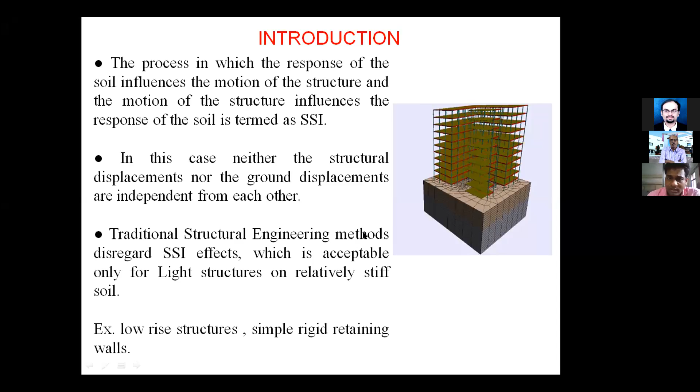Examples for traditional structures are low-rise structures and simple rigid retaining walls. The codal provisions for soil structure interaction are not included in IS code, but Eurocode 8 and JSCE 2005, that is Japan Society of Civil Engineers, have included specifications regarding this approach. P-delta effect is considered for the soil structure interaction. P-delta effect is the non-linear effect, also called the large deformation effect. So Eurocode and JSCE code both have special guidelines for soil structure interaction.

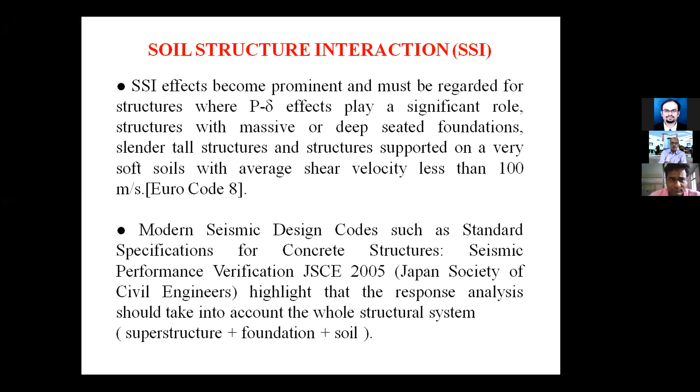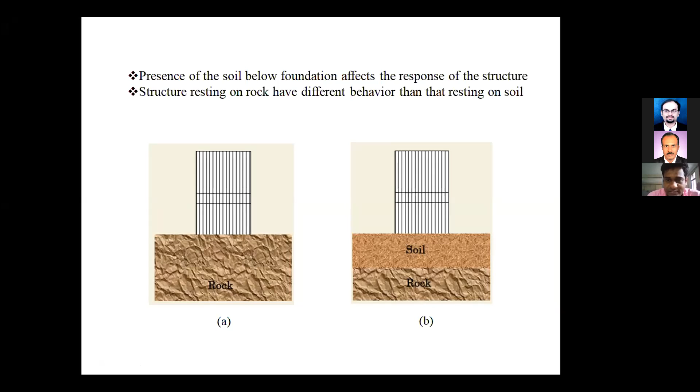Now how the shaking affects the structure is mentioned here. We are taking the second figure, figure B, from the previous slide. In this figure, there is a free field motion of the top layer of the ground, that is the soil strata. This free field motion is independent of the structure.

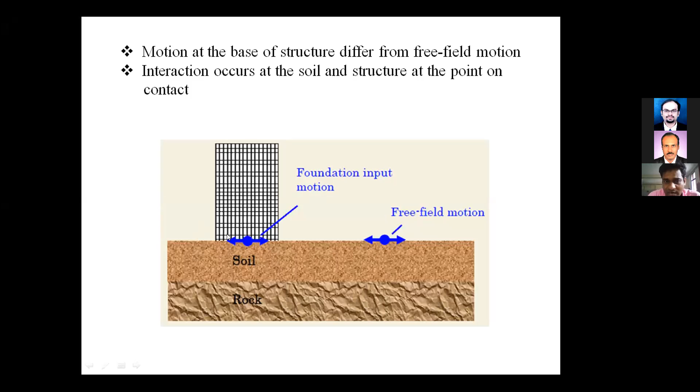Now if the structure is resting on the soil, the free field motion of the soil gets affected by the structural foundation. When there is motion, the foundation input motion and free field motion will counterbalance and affect each other, and hence motion of the structure at the base differs from the free field motion. The interaction occurs at the soil and structure at the point of contact, that is the base of the structure, the foundation.

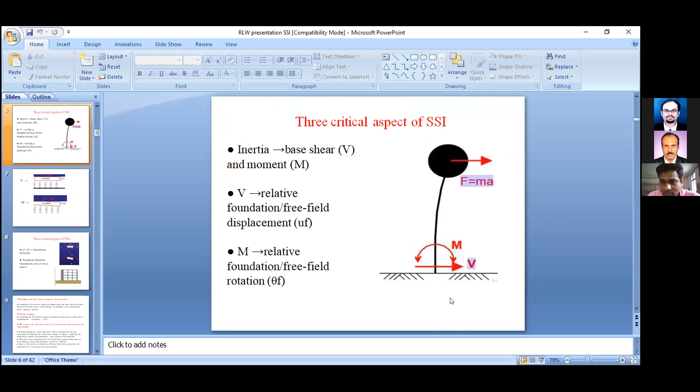Now the basic concept of the soil structure interaction, and the mathematical formulation for the soil structure interaction.

Considering a building having fixity at the base, and the mass, lump mass, at the top, like an inverted pendulum. The building frame has mass at each floor, it has stiffness, and it has damping at each floor. Now considering the simple building frame, F equals m into a, force equals mass into acceleration, and our equation of force is F equals K into delta, force equals stiffness into displacement.

Now, if we want to include mass and damping, our equation becomes mu double dot plus cu dot plus ku equals to f of t, where m is the mass, mu double dot is the acceleration, cu dot is the damping into velocity, ku is stiffness into displacement, equals to f of t, that is the force, and f of t will be represented by f of g, that is the force due to the ground motion.

Now here we have the force, and it should be balanced by the bottom force for equilibrium. As it is having displacement, the eccentricity will cause the moment, and hence we have the force moment.

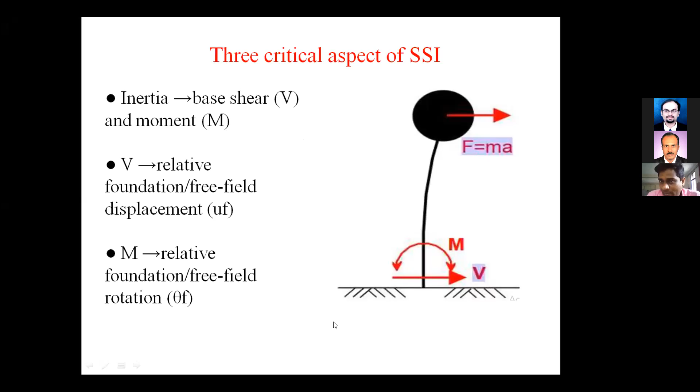Now consider this figure. The structure is resting on the foundation. We are taking the FBD at the foundation. The foundation is resting on the soil, and hence soil foundation interaction can be represented by the springs.

Here, these springs are not fixed, and hence rigid foundation fixity is avoided.

Now, in this case, if there is a displacement, it will cause the shear. In the vertical direction, springs are provided to cause translation in the vertical direction. In the horizontal direction, a spring is provided to cause translation in the horizontal direction, that will be the U, and hence it is the interaction for shear.

Now, if we consider the moment, moment is resembled by the rotation, and here the foundation is rotated by some theta amount, causing the moment. The spring will have some delta at this point, another delta at another point, and theta. Hence the shear and moments are to be considered at the soil structure interaction, and the corresponding equation has to be formed.

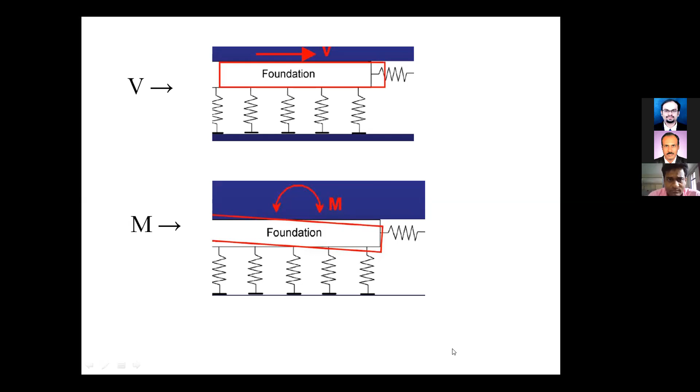Another figure shows the same effect for UF and theta, that is UF meaning displacement at the foundation, and theta meaning rotation at the foundation. Displacement causes the shear, theta causes the moment.

Now damping is also there, and damping is caused by the damping factors which are governed by the foundation which acts at the wave source.

The figure represents the FBD at the base due to the displacement causing the shear. The second figure is for the rotation causing the moment, and this figure is shown for the damping, and damping is for the waves at the wave source at the foundation, because there will be a dampness, and damping means opposition to the motion, caused by this foundation.

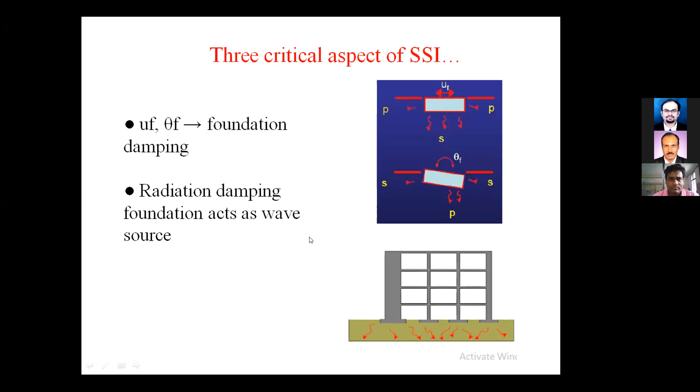Now we have seen the basic concept of the soil interaction, but yet we have not seen how this soil interaction is modeled. We have only seen that the soil interaction is caused due to the interaction between the soil which is present below the foundation.

Now there are some effects of the soil structure interaction on the structural response, and we can say that soil structure interaction effects alter the natural frequency of the structure. If we consider a structure resting on firm ground, the natural frequency of the structure resting on firm ground is different than the natural frequency of the structure resting on soil.

For example, soil structure interaction makes a structure more flexible than rigid, and thus it increases the natural period of the structure as compared to the corresponding rigidly supported structure. So soil structure interaction increases the natural period of the structure. This is the first effect of the soil structure interaction.

Now second, soil structure interaction adds damping to the structure, by means of the foundation present above it. Considering the soil structure interaction, it affects or increases the damping ratio of the structural system.

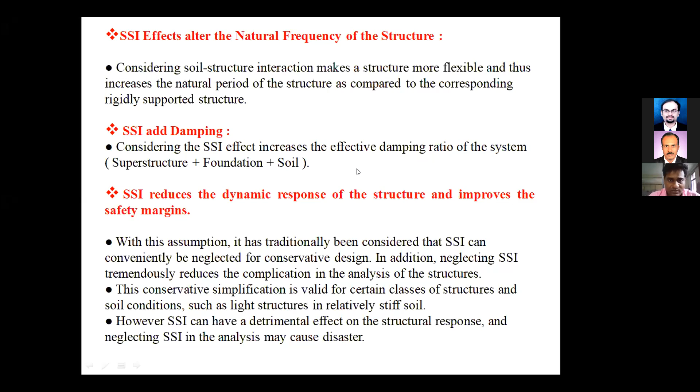Now we have the detrimental effect of the SSI, that is the soil structure interaction. An increase in the natural period of the structure due to SSI is not always beneficial as suggested by the simplified design spectrum, but we need to go for the simplified approach using the soil structure interaction, where we can check whether the natural...

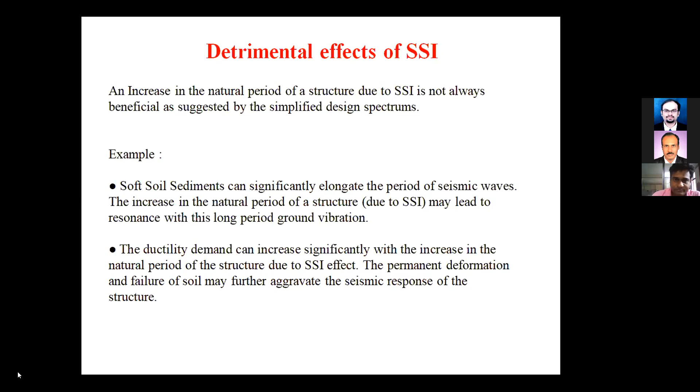Now soil structure interaction is classified into types: the first is the inertial soil structure interaction, second is the kinematic interaction, and third is the foundation deformation.

Inertial force equals mass into acceleration, and inertia should be considered, that is one type of interaction.

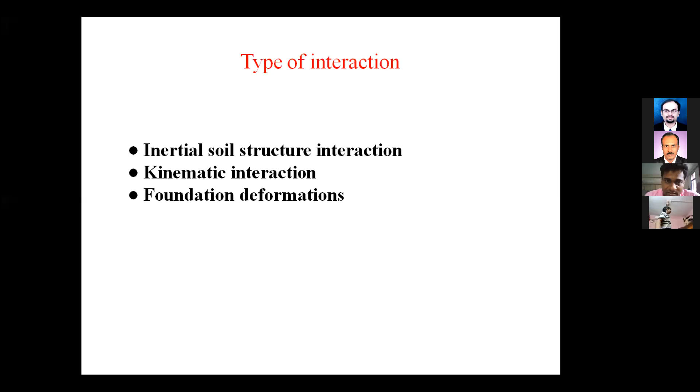Third is foundation deformation. Foundation means it has sufficient area resting, or sufficient mass over a sufficient area, resting on the ground at some specific area, that is the foundation. This interaction is called the foundation deformation interaction, as the SSI, soil structure interaction.

Now we will see all these three types of interaction.

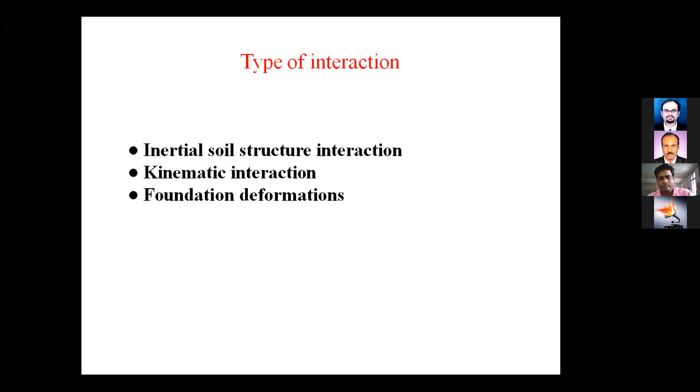Inertial soil structure interaction: the mass is resting, and mass causes inertia forces due to shaking. F equals m into a, mass into acceleration, and F is called the force, which is the inertial force. So there is inertial interaction and inertial forces in the structure, which are transferred into flexible soil by the foundation.

Inertia from vibration of the structure and foundation causes foundation translation and rotation, that is the displacement term as UF and rotation term as theta F. It directly affects the system flexibility and mode shape.

Mode shape depends on the fixity and the displacement, and hence both are dependent on each other. If there is inertial interaction between the soil and structure, the flexibility and mode shape will be different than that of a normal structure. The inertial soil structure interaction introduces foundation damping.

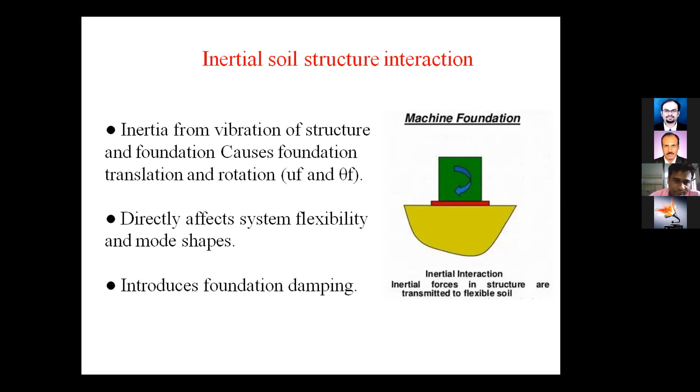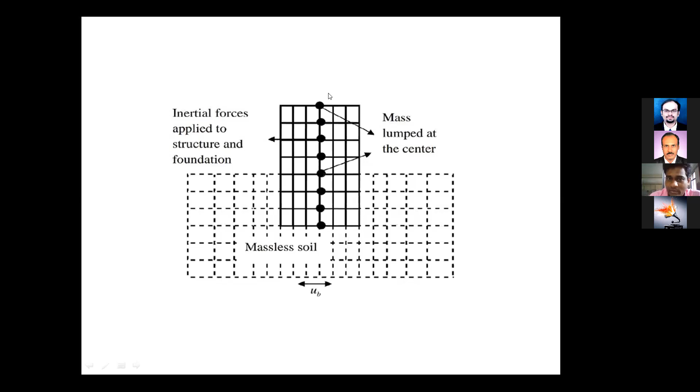The kinematic interaction is caused due to the ground motion. Kinematic means there can be a velocity with respect to time. We have the equations for u, v, and acceleration. For general fixity, we consider only force into delta, or k into delta equals F. But if we consider the kinematic interaction, we will have to consider the equation of motion, that is mu double dot plus cu dot plus ku equals F of t plus or minus F of g.

U1, that is the velocity of the above structure, with respect to U2, both depend on the ground motion reduction with depth, and hence it is called kinematic.

The kinematic interaction takes place due to two different velocities, because the velocity of the induced ground motion will be different, and may be larger than the velocity induced at the structural interface. So both are different, and the difference can be taken for the modeling.

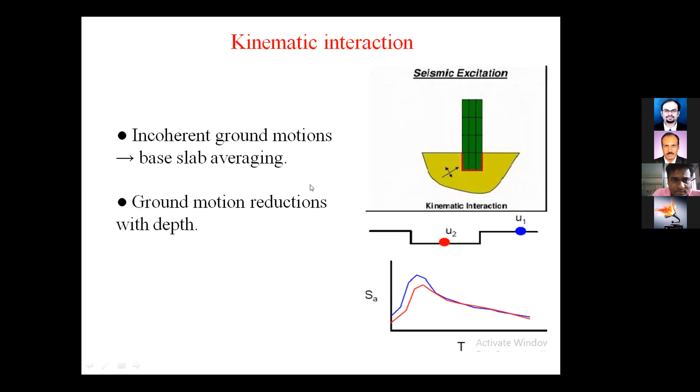Kinematic soil structure interaction has three primary causes: base slab averaging, embedment, and wave scattering. Base slab averaging results from the stiffness of the foundation at the base. Embedment means variation of the ground motion with depth, and wave scattering means scattering at corners and edges due to the induced vibration.

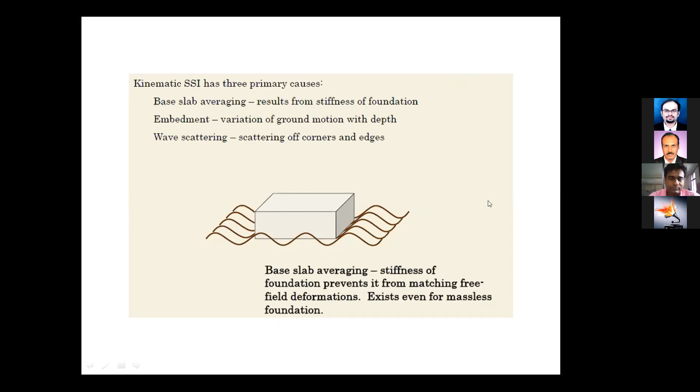Now, foundation can be a shallow foundation or a deep foundation. If we have a pile foundation, the pile can be rigid or the pile can be flexible.

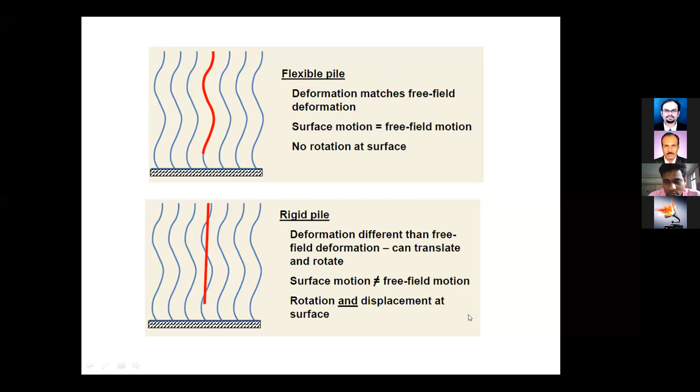Now for ground motion, we have the velocities: S waves, P waves, and L waves. The ground motion amplitude decreases with depth. If there's vertical propagation of waves, those are called shear waves, and hence vertically propagating shear waves can cause rocking as well as translation.

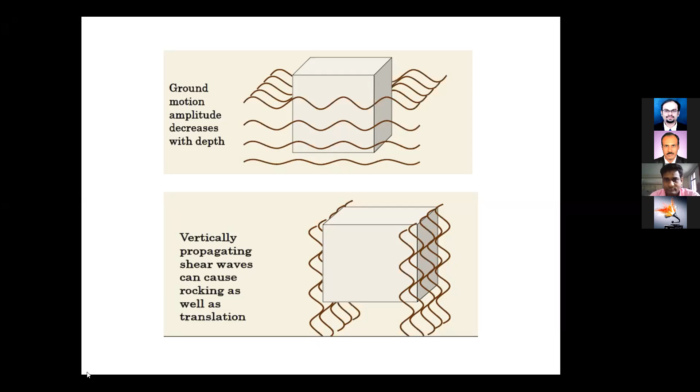General figure: when the load of the superstructure comes on the ground, and due to inertia, foundation deformation causes excess settlement, resulting in differential reaction at both corners of the foundation. That is the case when there is a foundation having sufficient depth.

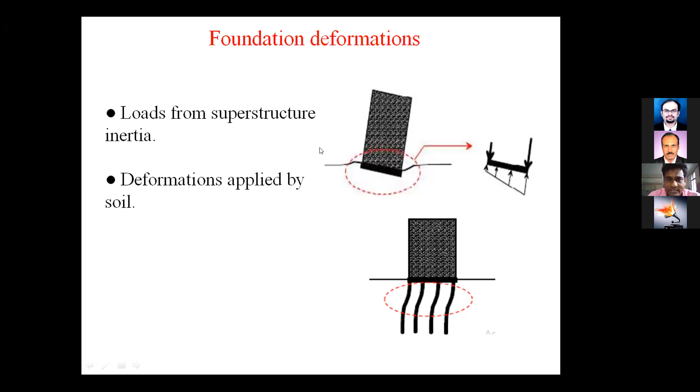Now, if the soil is deformed by some amount, the deep foundation in terms of the pile has translation and rotation. The first figure is shown for the foundation having sufficient uniform depth, but due to settlement it causes differential soil pressure. In the below figure, the pile is deformed and has some rotation as compared to the top surface, and hence it is the differential deformation applied by the soil. So this is the effect of the soil structure interaction.

Now, we generally go for piling. We provide the depth of the pile up to the point where the hard strata is available. Consider that soft, weak, compressible soil is available in different layers. In this case, for poor soil, we provide a platform, and that platform as a foundation is raised on the pile.

Now, this is the pile group having pile caps at this end, and these piles are resting on the hard strata. Though there is hard strata resting, and this pile is resting on the hard strata, the soil is still there, and skin friction is there.

Then the motion, the waves of the soil affect this deep foundation, that is the piles, and it causes translation and rotation of this pile because the piles have sufficient depth. Due to this, the load acting beneath causes horizontal translation, and the reaction at the bottom can be counterbalanced by the force and moment with corresponding rotation that will be available.

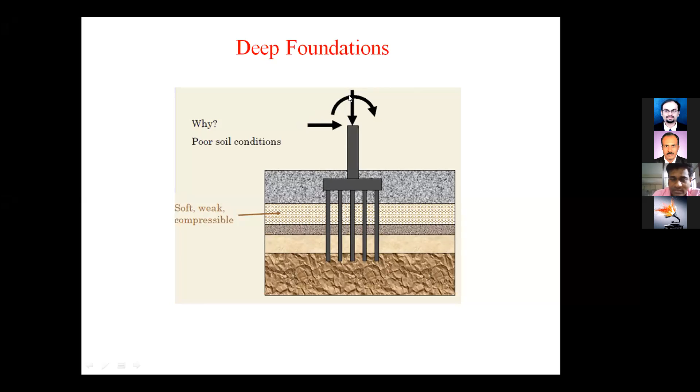Now, if we have the deep foundation, how is the deep foundation to be modeled using soil structure interaction? For modeling the soil structure interaction, we cannot have fixity at the base because it is not fixed, and hence we will have to provide allowable translation and allowable rotation at different interfaces, and those allowable translation and rotation can be modeled by equivalent springs.

So here the equivalent springs are provided at different levels. This figure shows the spring for downward translation, another spring in the horizontal direction for horizontal translation, and this represents the damping - this green rectangular shape plus vertical line is for the damping, because it also has damping. So all this can be modeled by the equation of motion.

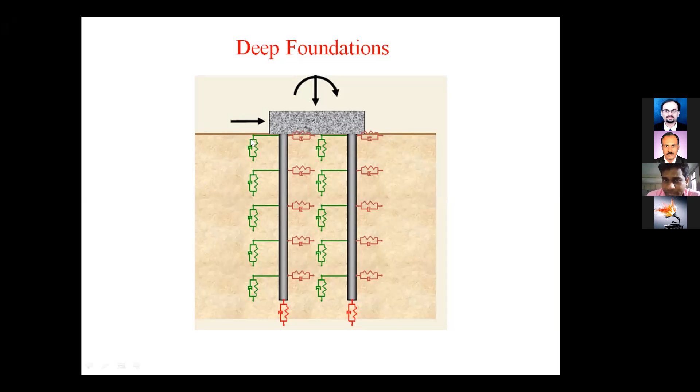When there's a pile group, uneven settlement decreases the axial load for potential pull out, or it can increase the axial load causing potential bearing failure at the base of the structure. Hence for this modeling we have the TZ, QZ springs and PY springs. TZ, QZ means it is in the Z direction, and PY means it is in the horizontal direction.

So we will see how to model the soil structure interaction through a suitable example. I have included one example in which we can model the soil structure interaction by providing springs and giving the specified value of translation and rotation to the spring by virtue of the soil properties.

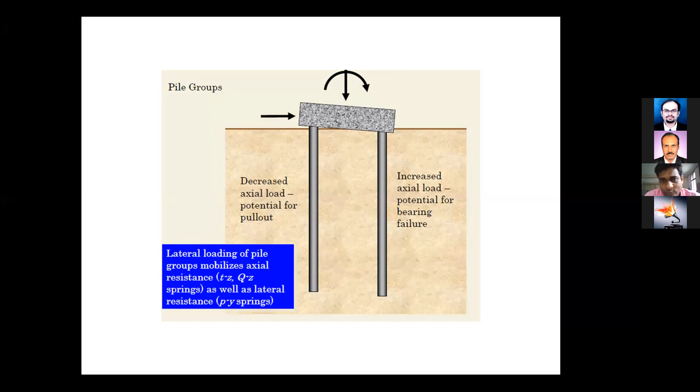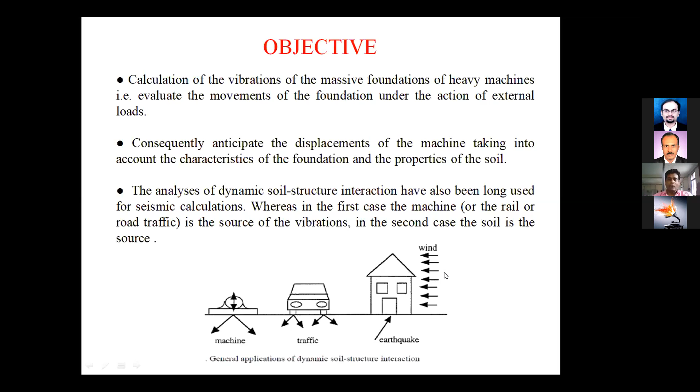Now, degree of influence of the SSI, that is the soil structure interaction, and influence of degrees of freedom. The response of the structure depends on factors such as the stiffness of the soil properties, then the dynamic characteristics of the structure resting on the soil, that is the natural period and damping factor of the structure, and the stiffness and mass of the structure. These are the influencing factors for soil structure interaction.

So while modeling soil structure interaction, we will have to consider the stiffness of the soil. From the stiffness of the soil, we will have to model the base, that is, we can call it the boundary condition at the base, by virtue of the stiffness of the soil.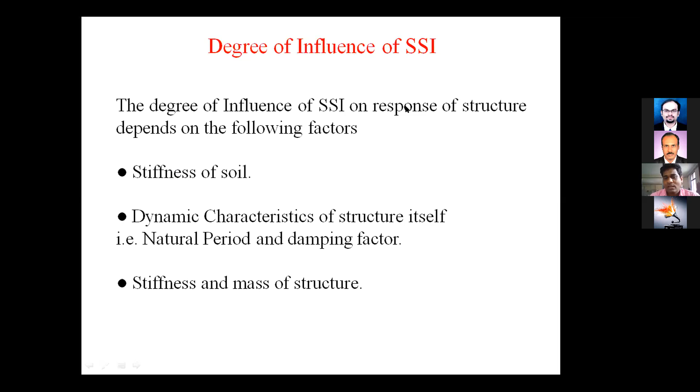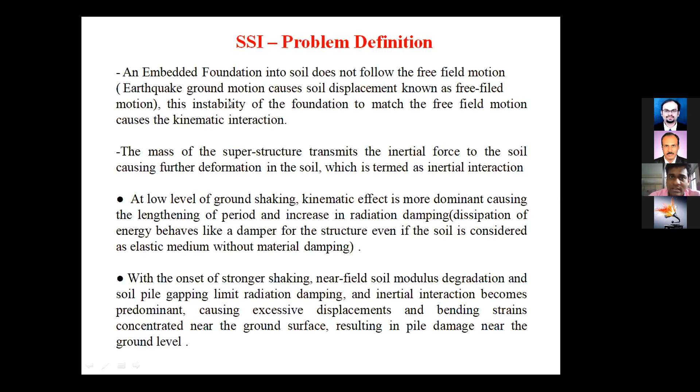SSI problem definition: we can say that earthquake ground motion causes soil displacement, and this is called the free field motion as we have seen earlier. This instability of the foundation to match the free field motion causes the kinematic interaction, because the mass of the superstructure transmits the inertial force to the soil, causing further deformation in the soil, which is termed the inertial interaction. Then there can be damping of the elastic medium. These problems can be termed soil-structure interaction, and hence it defines a specific problem of soil-structure interaction.

There are some methods which can be used for the analysis of the structure by using soil-structure interaction.

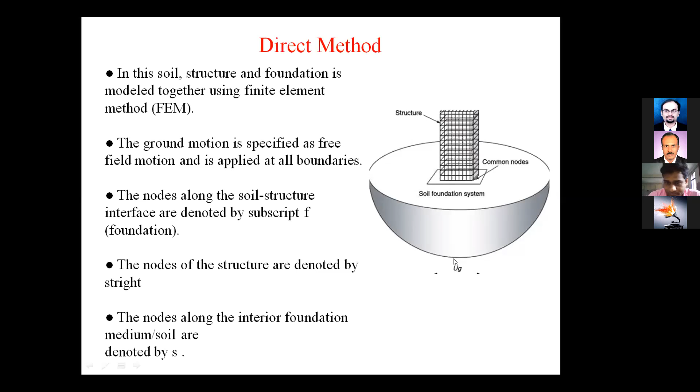The elastic half space model is used as the direct approach for modeling soil-structure interaction. For a general approach, we only use the building frame and fix the base by providing ux, uy, uz equal to 0, and theta x, theta y, theta z equal to 0 — the specified boundary condition of fixity. That is the simplified boundary condition. But in the direct approach of SSI, we must consider the elastic half space model, which is the model for the soil beneath the foundation.

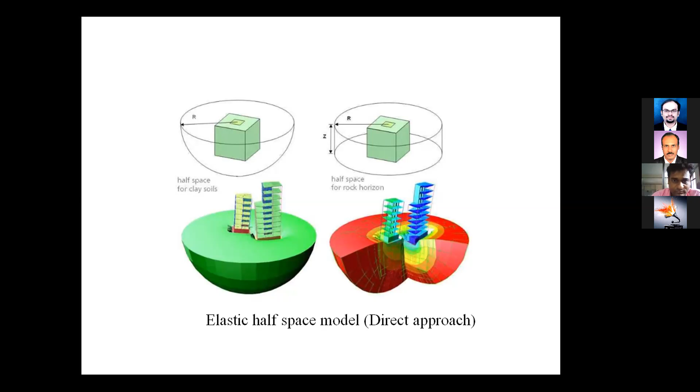Using the same figure, we have the equation MA + CV + KX = MG. What is MA? Mass into acceleration, A can be termed in terms of X. Now, when we do not use the dynamic equation, we use only Kx = Mg, meaning Kx = F. Mg is force, mass into acceleration due to gravity, so to speak. Kx = F, that is the static case.

Now for dynamic analysis, we consider CV plus MA. CV means C times X dot, and MA means M times X double dot. So KX plus CV, meaning C dx/dt, plus MA meaning M d2x/dt square — that is the equation.

Now Mg can be termed as F plus Fg. That is the force on the structure in the horizontal direction, plus Fg, the force at the ground due to ground motion.

The foundation media is considered here below the foundation. The interaction or interface is considered over this area. This structure is modeled, and it can be represented as an inverted pendulum having different degrees of freedom at different levels.

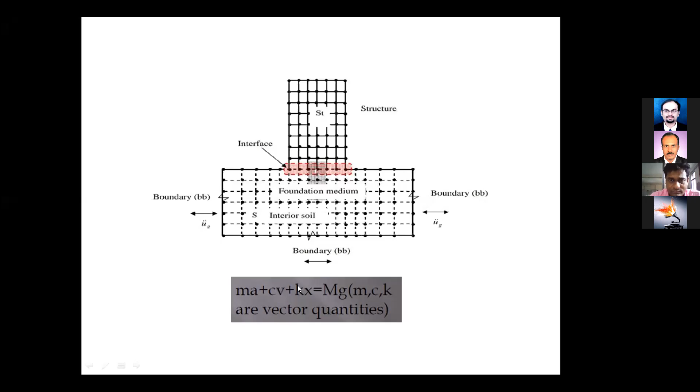There are some disadvantages of direct methods. The good representation of the damping matrix is difficult using the direct method. If the superstructure is modeled by a 3D system, the problem size becomes very large, and the modeling of the soil foundation structure interface becomes complex. That is the disadvantage of the direct method.

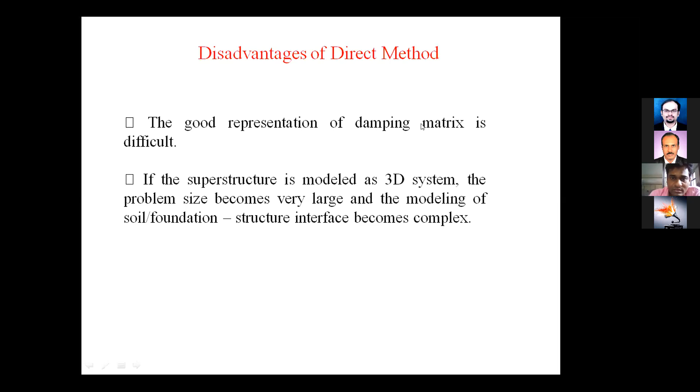Hence, to overcome the direct method, there is another method, the substructure method. In this method, one structure is resting on another, and both structures are modeled separately by providing the interaction. It is computationally more efficient than direct analysis, as most of the disadvantages of the direct method are overcome by the substructure method.

In this substructure method, the effective input motion is expressed in terms of the free field motion of the soil layer, and it is initially considered while modeling. In continuation, the soil foundation medium and the structure are represented as two independent mathematical models, as shown in the figure.

So there will be two forces: one is the reaction from this, so it will be oppositely modeled here. That force will be provided here, and relative displacement and rotation can be provided here. By providing this, the structure can be modeled and analyzed, causing the effect of this substructure on the existing structure, and that will be the actual model of soil structure interaction.

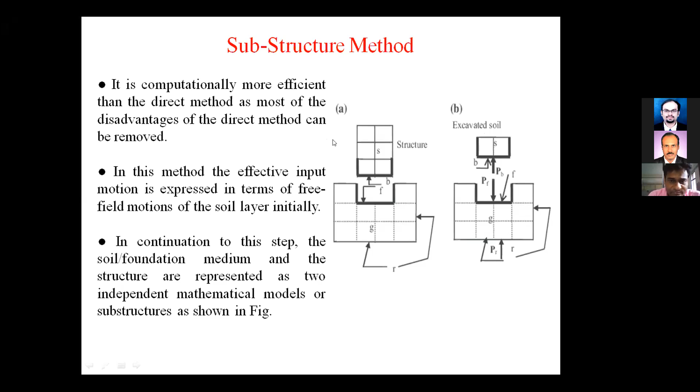Now the damping caused by this is provided here. Translation and rotation caused here will be provided and applied in the opposite direction to this portion of the structure. So that is substructure 1, which we want to analyze and design, and substructure 2 is for the soil interaction. By modeling this part with spring and damping at this junction, we model the structure for soil structure interaction.

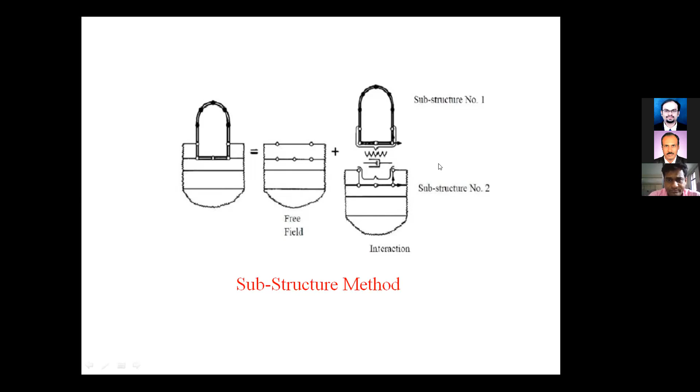Now, comparison between direct analysis and indirect substructure analysis. Suppose this I-type structure is resting on the foundation media, with the foundation and piling. Now for direct analysis of the method, as we have seen...

we provide translation and rotation in terms of springs and stiffnesses at different levels. The piling has some 10 to 15 meter depth, divided into 3 to 4 parts, and at each level we provide translation, rotation, and damping in the TZ direction, QZ, and PY direction also. This means it is three-dimensional in effect, and this induces vibration, with translation and rotation to be modeled for the soil structure interaction.

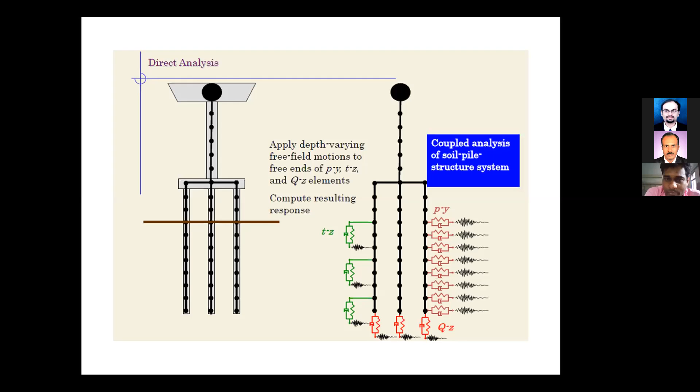Now, if we consider substructure modeling, instead of considering the entire area of the piling or foundation, we convert this into equivalent spring stiffnesses. These equivalent spring stiffnesses will be provided at the bottom of the foundation, at the support, by providing delta x, delta y, delta z, then theta x, theta y, theta z, in terms of this rotational spring and translational spring with damping.

So this is the actual modeling of this substructure. There are different approaches for this modeling. One approach says to cut the piles at the mudline and replace with spring dashpots—that is the equivalent stiffness spring model. Another applies kinematic pile motion at the mudline to determine horizontal, vertical, and rotational springs—that is the spring modeling—and computes the resulting responses. That is the SSI modeling using the substructure method.

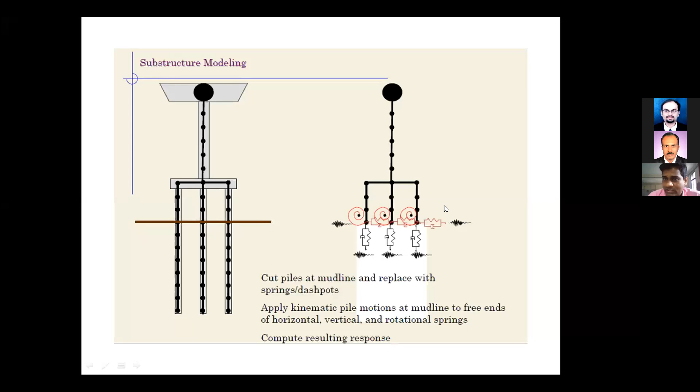Denoting the modeling using the spring, we have a building structure resting on the ground. The effective area of the soil is considered here, and we want to model the soil structure interaction for this frame. As usual, we will convert this into equivalent masses with inertia, first level, second level, third, fourth level, up to the bottom.

Bottom will also have to be modeled for vertical rotation, translation, damping, and horizontal translation and damping. This part shows horizontal translation and damping both available. Here, rotational spring with KR, a translation spring is also there, and CR is the damping. Moment mass M0 and inertia I are modeled. So at this point, it is modeled for the soil structure interaction, and the upper portion is modeled the same.

We go for the general modeling. This is the equivalent modeling in terms of rotational spring, translation spring and damping at the bottom. So this part one and this second part together consist of the soil structure interaction in terms of the modeling. If we don't have soil structure interaction, simply keep this as a fixed end.

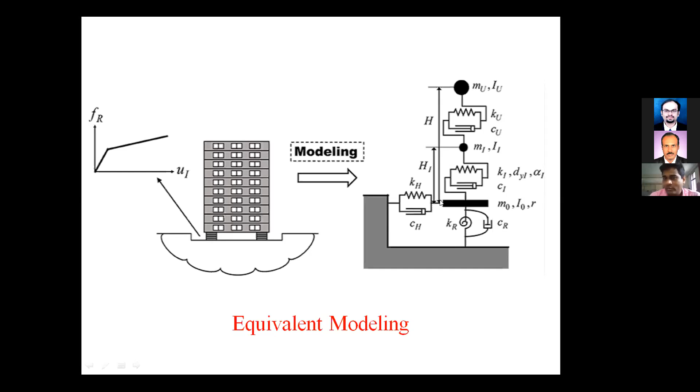For this modeling, we have different methods. One method for the analysis of the structure using SSI is the Winkler approach. Second is the PY method, that is the P delta method. Elastic continuum approach for the soil beneath, and finite element method.

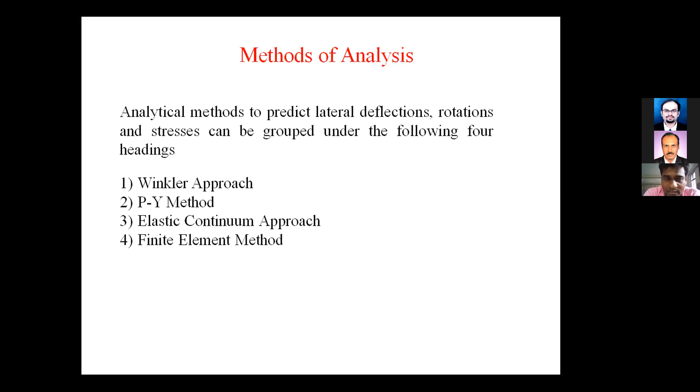Finite element method using generalized software is the easiest way because both can be modeled by providing the meshing. We only have to consider the area of soil with respect to some depth. That is the FEM modeling. Elastic continuum approach is continuous media, and it will have to be modeled. PY involves large deformation. And in the Winkler approach, we will see how it is used for the modeling of building frames.

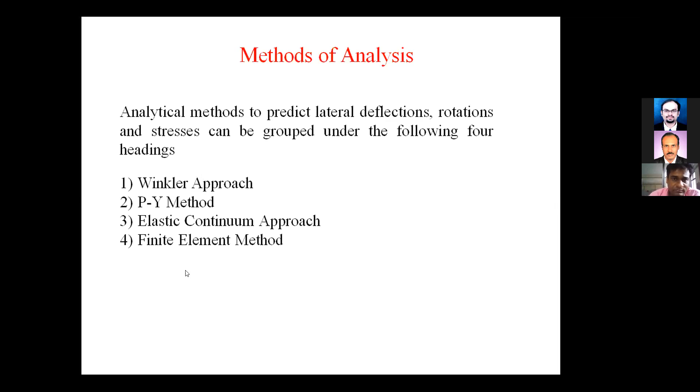Now, in the previous figure, we have seen this. Suppose this junction is the base. If we have a fixed base, we will provide only fixity here. No need to provide this rotational spring and translational springs.

What is the meaning of rotational springs? It is for theta x, theta y, theta z, and this is for ux, that is ux corresponding to kx, and fx will be kx into ux. Here we have this direction, that is x direction, we have y direction, and we have z direction. So you can term this x, y, and z as per your notations. In this equivalent spring model, we have kx, ky, kz, that is the stiffnesses of the equivalent soil spring.

So this spring is called a soil spring. Why soil spring? Because there is soil beneath the foundation, and above this there is structure, and at the base of the foundation we are providing the spring, and that spring resembles the soil, hence it is called the soil spring. Soil spring acts as the soil media, or soil spring plays the role of soil, and hence for playing the role of soil, this soil spring should have the properties of the soil.

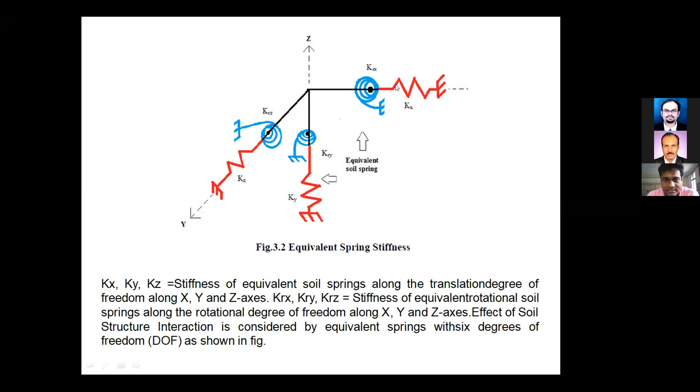So we have to go over the boundary conditions. If we have a fixed beam, what are the boundary conditions for a fixed beam? For fixity, we have boundary conditions as ux0, uy0, uz0, or generally u0, theta 0, meaning fixed. If we have a hinge, what is the boundary condition for a hinge?

Displacement is 0, but rotation is present. If we have a roller, what are the boundary conditions for the roller? For boundary condition of the roller, delta is allowed, meaning horizontal translation is allowed, but vertical delta is 0, and theta is present for the roller.

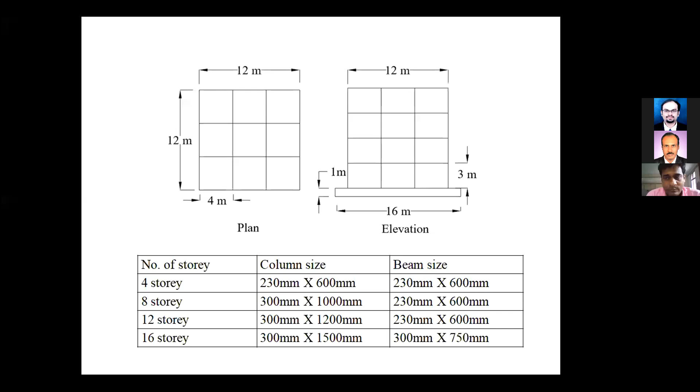Now, instead of having much attention on the figure, I will show you how we have converted the equivalent spring stiffnesses, how we have calculated and how we have provided for modeling in the Winkler approach of soil structure interaction.

Now we have considered different soil properties. Generally we know we have hard soil, rock soil. So if there is a soft soil having a different modulus of elasticity, that is the lesser modulus of elasticity than the hard soil, medium soil, hard soil, rocky basalt, and fixed. The soft soil has modulus of elasticity less than the others.

Now Poisson ratio is different for all types of soil. Shear modulus is lesser for the soft soil, higher for the rock basalt. Unit weight is lesser for the soft soil, higher for the rock.

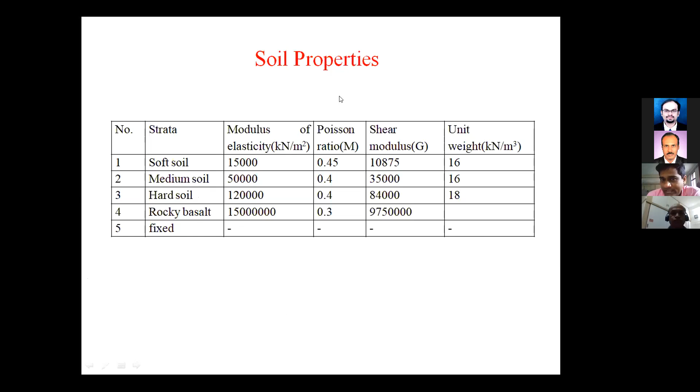Now in terms of the fixed base, why are the terms kept zero? Because for fixed base, we will not have to calculate delta x and delta y, because deltas are zero, and hence we have kept this as a dash, that is already zero. Now for these different types of soil, we have calculated thetas and deltas.

Now we will go for the modeling of the base. How to model the base? Different load conditions.

Now the main part is soil structure interaction and its modeling with respect to the equivalent spring stiffnesses. Now we have equivalent spring stiffnesses and we have the formula. Which are those formulas? We have seen this formula. I will go back.

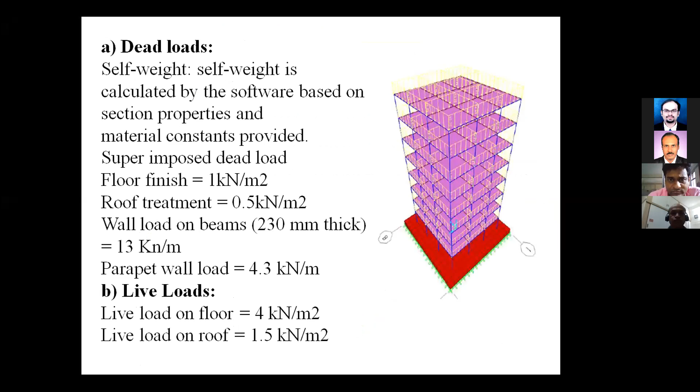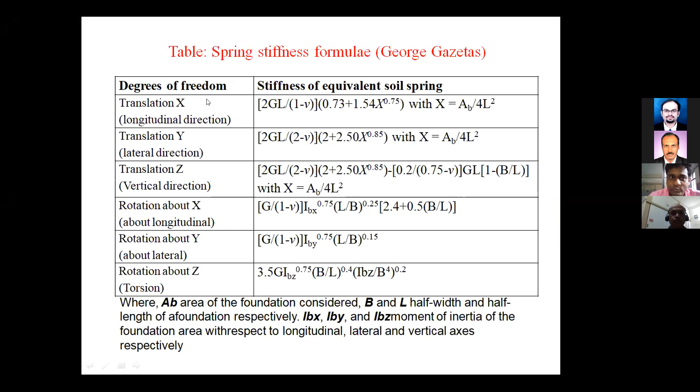We have this formula for stiffnesses of soil spring, that is modeling the soil beneath the foundation in terms of springs, providing these spring stiffnesses in terms of the translation XYZ direction, rotation XYZ direction, and this is calculated here.

For loose soil, medium dense soil and rock basalt, all these are calculated by the formula. Now if we want to use the software in SAP, we have modeled this, and in SAP you select the base, that is the bottom most of your column where we provide the fixing.

At that point you right click and provide the joint spring, and for that joint spring you provide these values. For loose soil we have delta x, delta y, delta z, theta x, y, z. You provide the first value, second, third, all these values, and where you have provided the spring, you replace it with the existing spring.

Now the existing spring in your model will be replaced by this spring having this property. It indicates that whatever calculation we have carried out for one type of soil, that type of soil is modeled as SSI by using the equivalent spring model with this software.

Now for the second, medium dense soil, you replace these values by these 6 values. You provide these 6 values that will contribute the equivalent spring stiffnesses for this type of soil. For dense soil, use these values here.

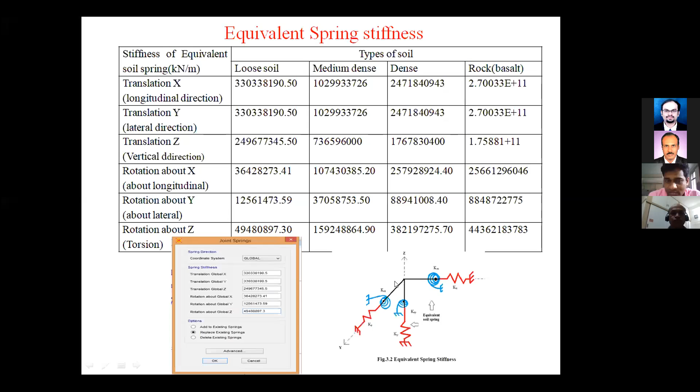By having these equivalent stiffnesses provided at the base, we will get this type of figure where we have modeled all this. Now this type of phenomena is called the Winkler approach for the spring model of SSI, that is soil structure interaction. Now provide the response spectra.

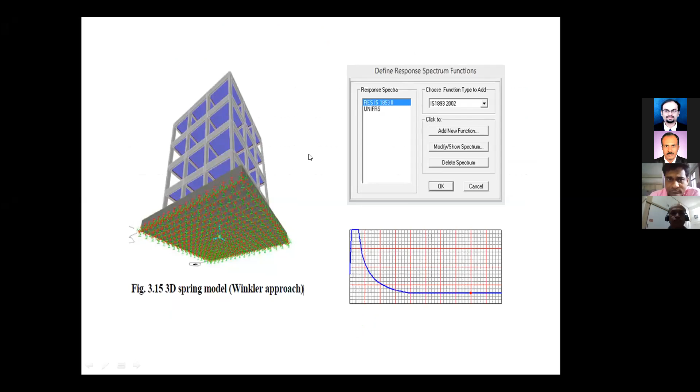Use seismic zone, use the soil type—loose soil, hard soil, dense soil—provide here. Use the time period versus acceleration data, and from that you form your spectra. And for this spectra, you go for the dynamic analysis.

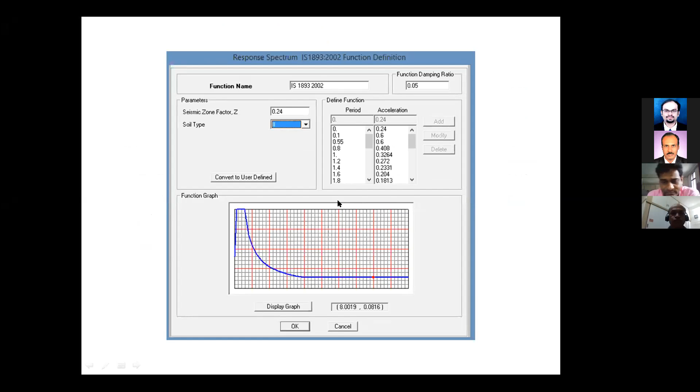You find the result. We will get the bending moments, shear force with respect to the soil interaction of this. Now here whatever forces and reactions we get will differ from the normal structure having the fixed base.

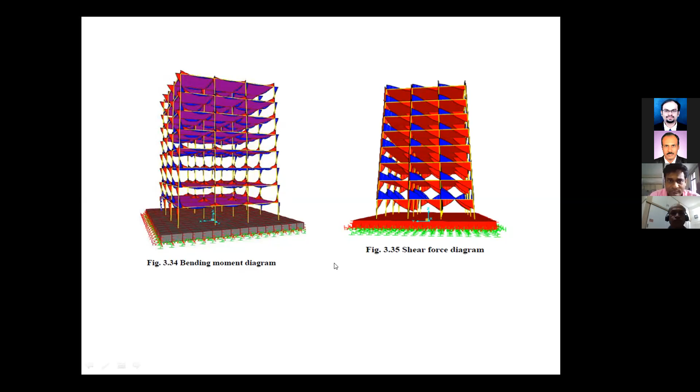For higher stories, for having the greater number of stories, the frequency is much lower for the lower story, and the time period increases as we go for a higher number of stories.

So when it is fixity, time period is higher and frequency is lower. When we go for the soil interaction, frequency increases.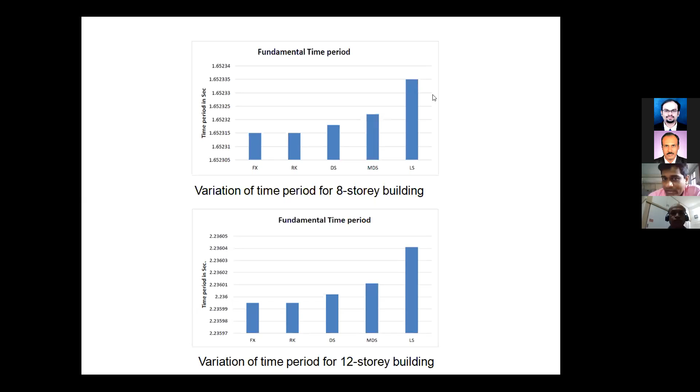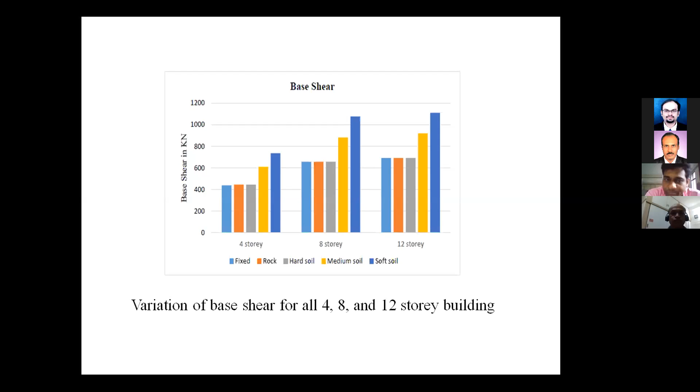Base shear for different types of soil: fixed, rock, hard soil, medium soil, soft soil. A comparison of base shear and its variation for 4-story, 8-story, and 12-story buildings is made. In this graph, we can see for fixed soil it is less, whereas it increases for soft soil. If we increase the height of the building, going from 4-story to 8-story, the 8-story will have maximum seismic weight, and hence maximum seismic weight of the building will contribute to maximum base shear.

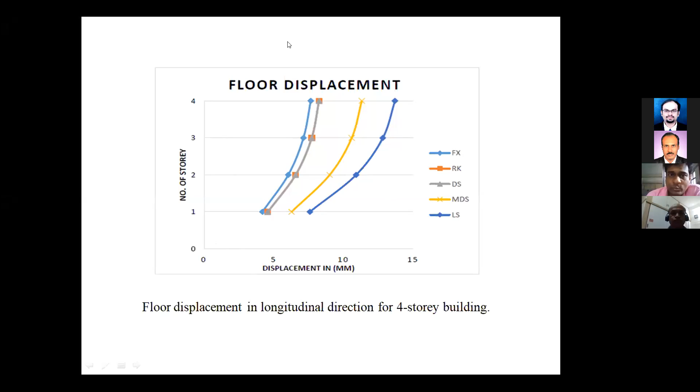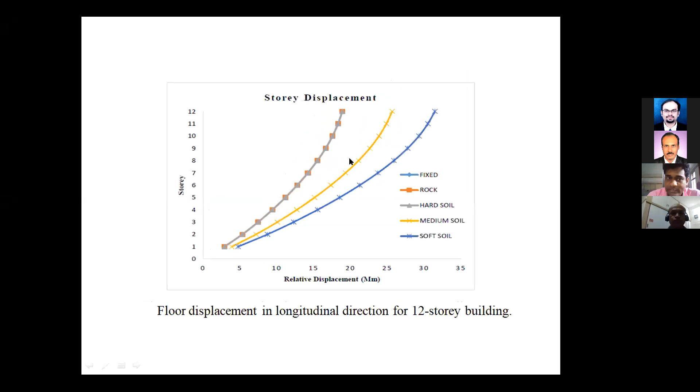So that was floor displacement for different stories. For an 8-story building, the same pattern is observed. For a 12-story building, the same type of pattern is observed for story displacement starting from the first floor to the 12th floor.

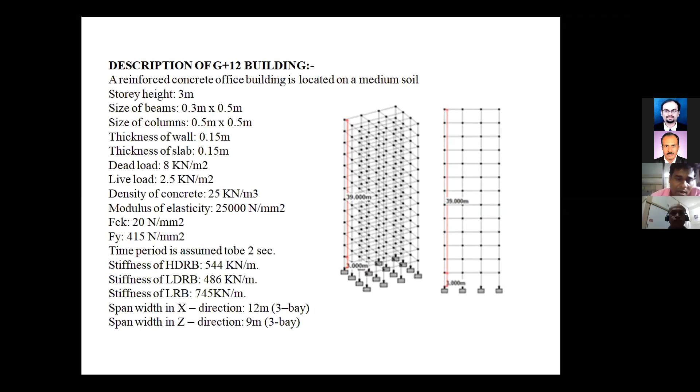Now, to model the base isolation, the base is modeled using this type of isolation where we have the lead rubber bearing and some different types of bearings. So here we have used the lead rubber bearing to model the base. HDRB, LDRB, LRB: High Damping Rubber Bearing (HDRB) has 544 kilonewton per meter stiffness. LDRB, Low Damping Rubber Bearing, has 486 kilonewton per meter stiffness. LRB is Lead Rubber Bearing. These are the bearings used as base isolation—having plates alternately placed with rubbers, hence lead rubber bearing.

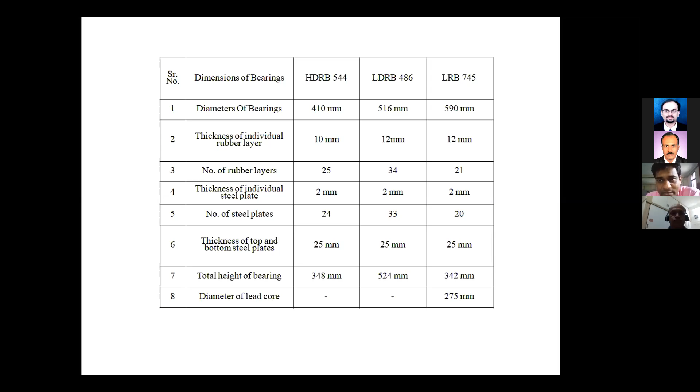When an earthquake comes and provides ground shaking, at a fixed base the energy dissipation is high. If you provide a bearing at the bottom, that dissipation of energy gets contributed to the bearing—the lead plates and rubber—and dissipation of energy takes place at that point, avoiding the translation of energy to the upper stories. So this is the concept of the rubber bearing.

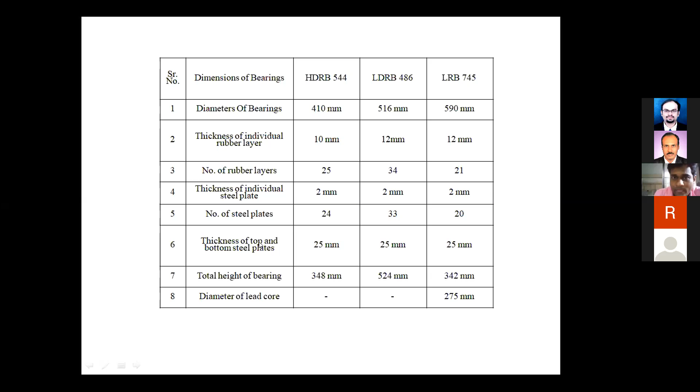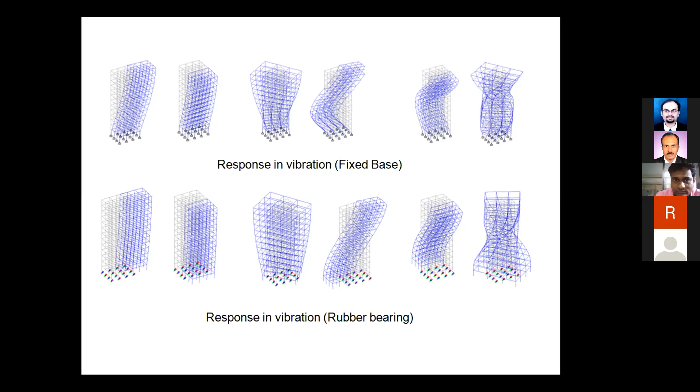So these are some results for different modes and frequencies with fixed base and different rubber bearings at the bottom. This is the story shear in kilonewtons for different rubber bearings: LDRB, HDRB, LRB, and the percentage difference between them.

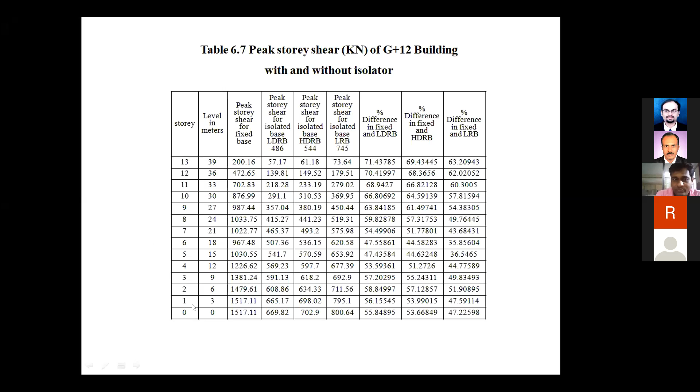So we have some conclusions depending on the soil interaction study. We have seen the frequency is increased; resonance can occur if you consider soil interaction, so it should be reduced. The inertial forces are increased if we consider soil interaction.

For modeling the soil interaction, we have two methods: the direct approach and the substructure approach. In the substructure approach, there are again different methods. We can use the FEM method, or we can use the Winkler approach.

For these methods, we will have to consider the soil media below the foundation and provide the interaction for this. So we will have to provide the base with equivalent spring stiffnesses, which will be given by translation and rotation through specified values, and that will contribute to the exact SSI, soil structure interaction.

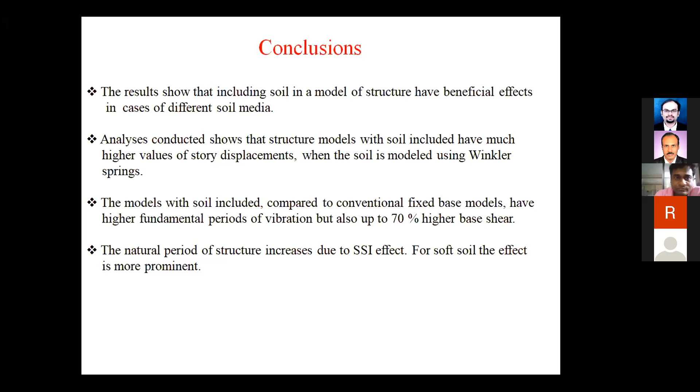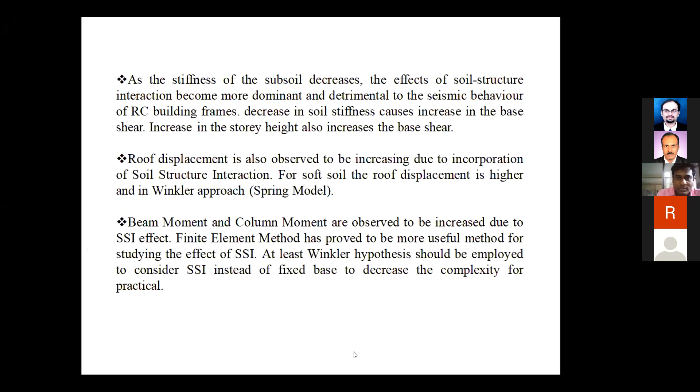We have the spring model. Roof displacement is observed to be higher for the spring model, that is for SSI. And we can have the variation in shear forces and bending moments for the beams and columns for different stories of the buildings. So this was the conclusion regarding this study.

So I will stop here for explaining the soil interaction and these different models.

Yes, sir. So one question is there in the chat box. Okay sir, you can read the question. Shall I go for the previous question, yesterday's question first? Yes, sir, yes sir, okay. The question was very simple.

Is it necessary to model the slab at the foundation level or not? Slab at the foundation level — okay, so it depends on the modeling.

If you go for FEM modeling, you will have to model the upper structure and also model the foundation structure as a slab with a higher equivalent depth, not a smaller depth, and that equivalent depth will be higher than a normal slab. Those will be modeled using the FEM approach, so both structures will have to be analyzed at a time, which will give you the soil interaction.

But for modeling that slab at the bottom using the FEM approach, you will have to specify the values of density of the soil. That is the first method.